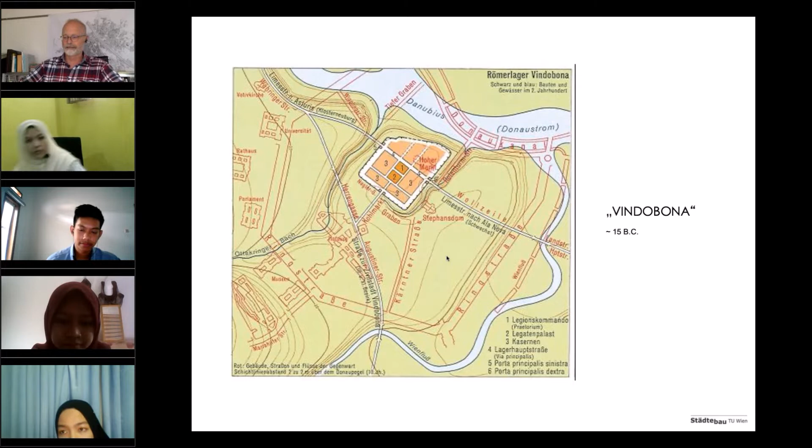These Roman camps always had the same layout, and they are still somehow visible in the urban structure, in the morphology of the city of Vienna.

And also what we can see even in this urban structure is the force of the water of the Danube River that damaged even the Roman fortification 2000 years ago. So it's really an important element of the urban structure in Vienna, the river, the Danube River.

In the medieval time, Vienna was not that important. It was a city among others. It was the capital of a small empire among many, many others in Europe.

Europe at that time was divided into a lot of small kingdoms, and Vienna was the capital of one of them, although they already started to build a huge cathedral, a Catholic cathedral at that time. The city itself was fortified. It was strongly related to the Danube River, but it was a dense but only small European city.

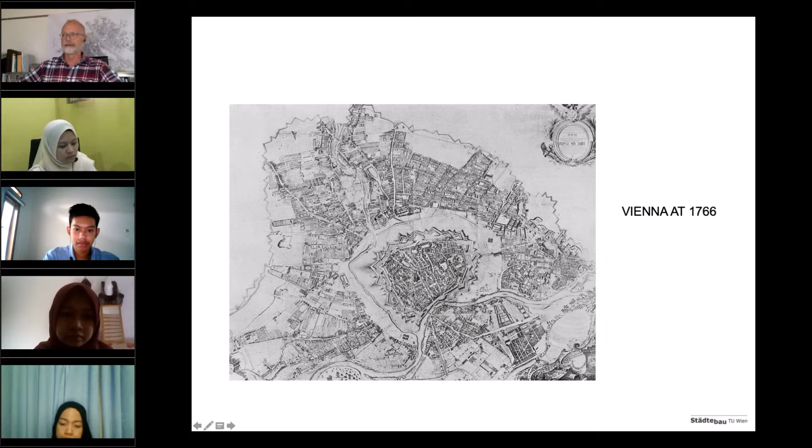Nowadays, this central part of the city, just to give you an overview a little bit about the city and an impression of how it looks like, the city center, which was the medieval city core at that time, is a very attractive place for international tourism.

The entrance gate to the emperor's palace - the Habsburg Empire, as you might know, ruled big parts of Europe in the last 600 years. And small markets and nearly medieval environments also appear in the structure of the city.

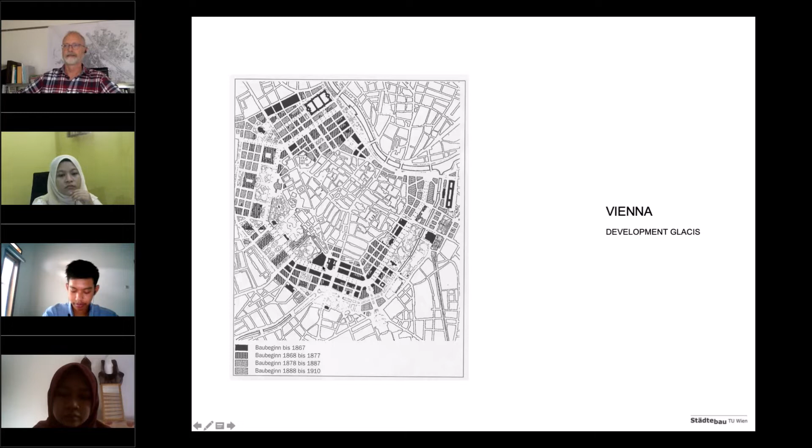A big change happened in the 19th century when the fortification was broken down and a huge area around the city center was totally restructured by a very representative boulevard, the Ringstraße, which hosts also the university, the parliament, the opera, the main theater, and the city council of Vienna. So many public and representative buildings have been located along this new boulevard in the 19th century.

It has vineyards, it has forests, and also a quite massive amount of agriculturally used land to feed the city. So in vegetables and salad and these kinds of things, Vienna is self-sufficient.

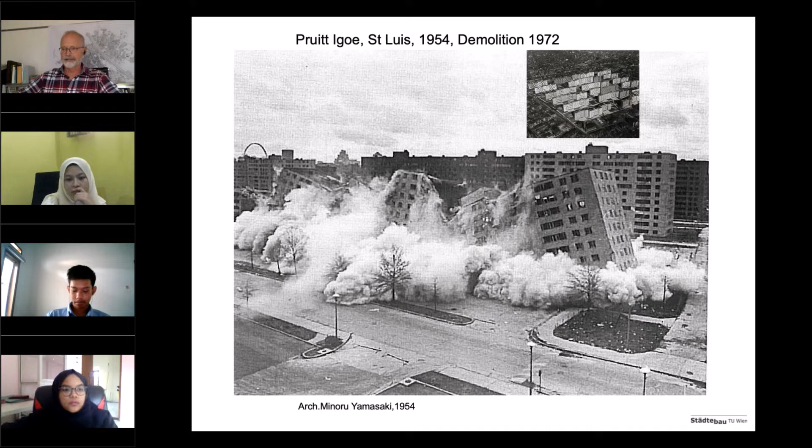This city is an old city and had very difficult periods, which I will talk about later. But why jump to St. Louis and to Pruitt-Igoe, the first radical demolition of modernist buildings in the 20th century? Because this time, the 70s and 80s, was the beginning of an immense change in the policy of how to deal with the old constructions and old structures within the city of Vienna.

The idea was that this district should be destroyed and replaced by a modernist social housing project that provides green space, parking, and sunny balconies and bathrooms, and all the facilities and infrastructure that a modern city at that time should provide to its inhabitants.

But a group of young architects and young students, also from our university, engaged themselves against the demolition of this Baroque district and started to demonstrate and to activate the politics, to protect the buildings and to renovate them.

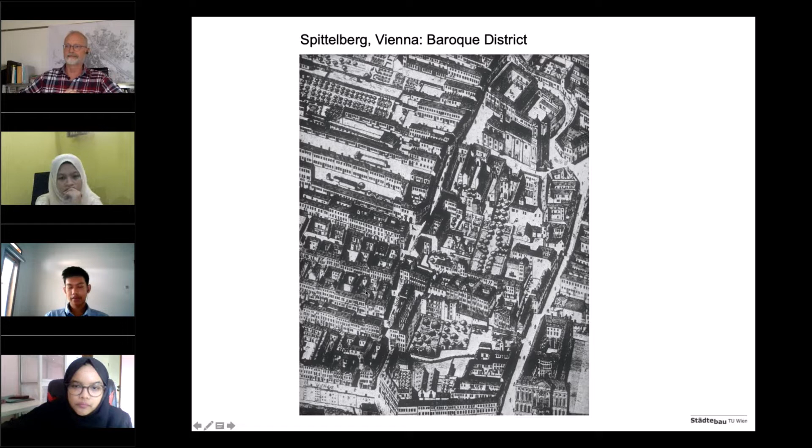This is the Baroque district I'm talking about, a very dense, very tiny and very interesting structure, but also in a very bad condition. So this was the beginning of the urban renewal program of Vienna.

This is very strongly related to social housing, because the principal idea of this program is that by renovating the districts and old buildings, the inhabitants should not be moved out. They should be able, even after renovation, to pay the rent, and they should be able to live in the environment they grew up in or lived in before.

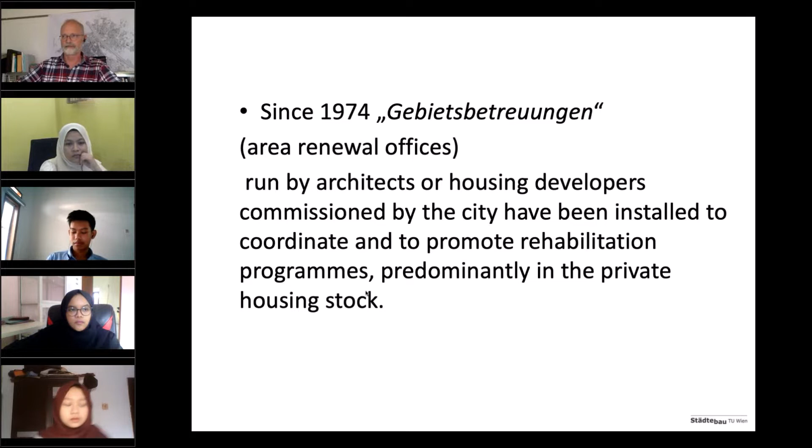Also at this time, they started neighborhood councils that somehow provided information for the process of renewal of the historic city, and also helped both the house owners and the users, or the people inhabiting the buildings, on how to deal with this process of renovation and with the existing offered funding for the renovation of their units and buildings.

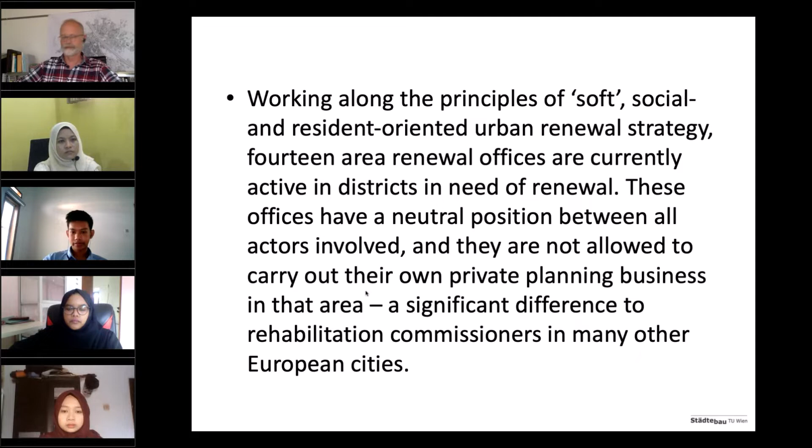This social or resident-oriented renewal strategy was divided among a couple of different offices. They were run by architects, in cooperation with social workers and construction engineers, and they provided a lot of information and interactivity between the different parties involved in such a renewal process. And for this strategy, Europe's cities learned a lot from Vienna.

This rehabilitation program, now at the end of this process, as you can see in the next slides, refurbished approximately 250,000 apartments. That means over 7,000 to 10,000 a year.

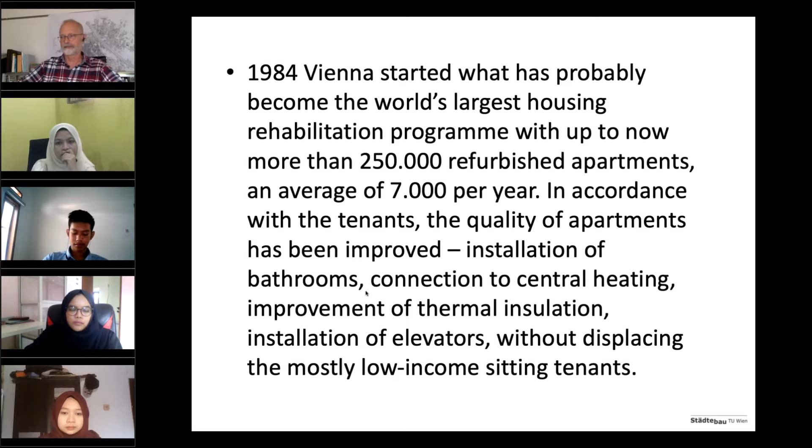During the last decades, this really changed a lot the situation of the housing market in Vienna. Not only for the good, because this improvement in the quality of the apartments also increased the market prices, and somehow caused a segregation for those who couldn't afford this new market situation in the city of Vienna.

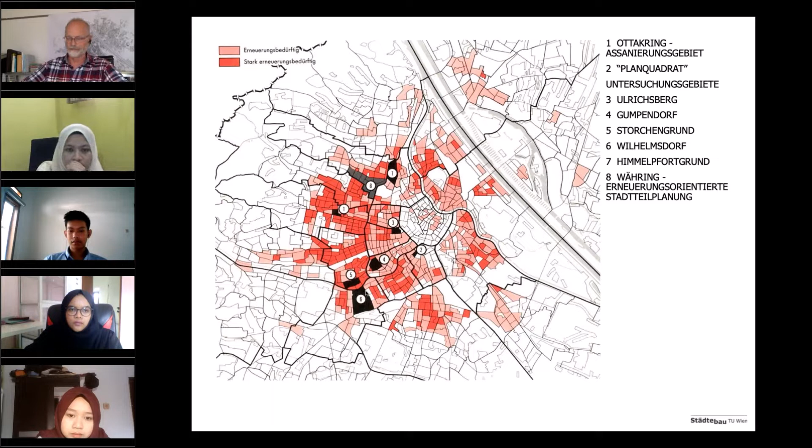To give you an impression about the housing situation of the beginning or middle of the 19th century, I would like to show you not only the urban fabric of this Gründerzeit development of Vienna from the 1850s, 1880s, but also some floor plans and pictures of the life circumstances of the people in everyday life.

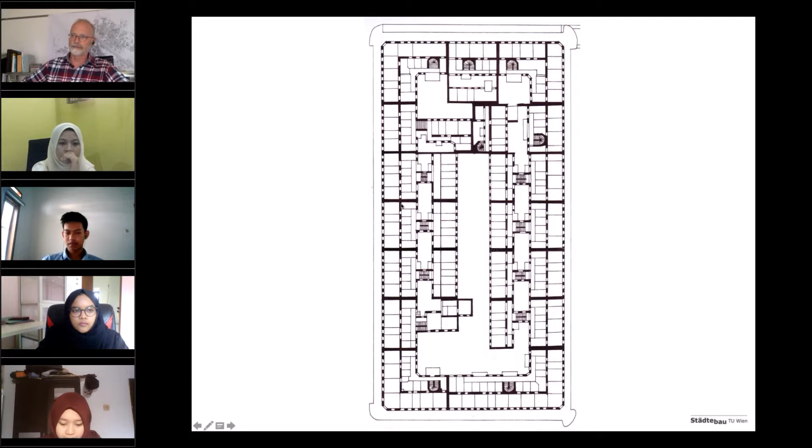Each unit here is one house, owned by a person or an institution, divided into a couple of very small apartments. Some of them only exist of a kitchen and a small room. They shared toilets usually outside on the corridor, and they shared one staircase. You see very small courtyards, nearly no light in the inner rooms, no ventilation for the kitchens — really difficult situations and circumstances for the people living at that time.

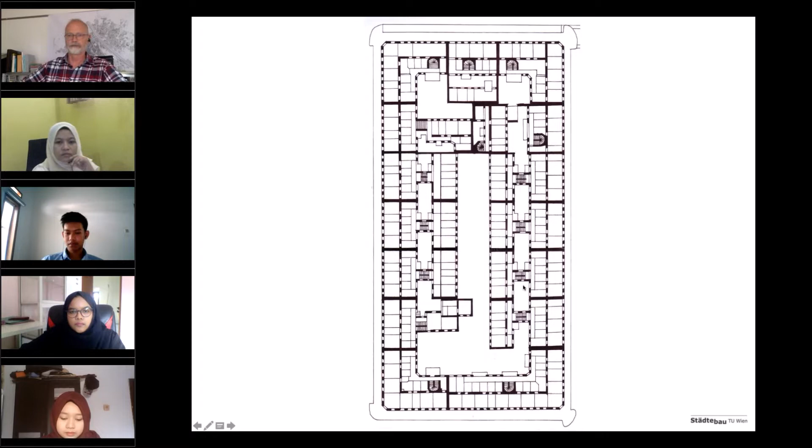You can imagine 10, 15 people living in one of these 30 square meter apartments, sharing their bed, hardly able to heat their apartments with coal or wood. Not a very pleasant situation.

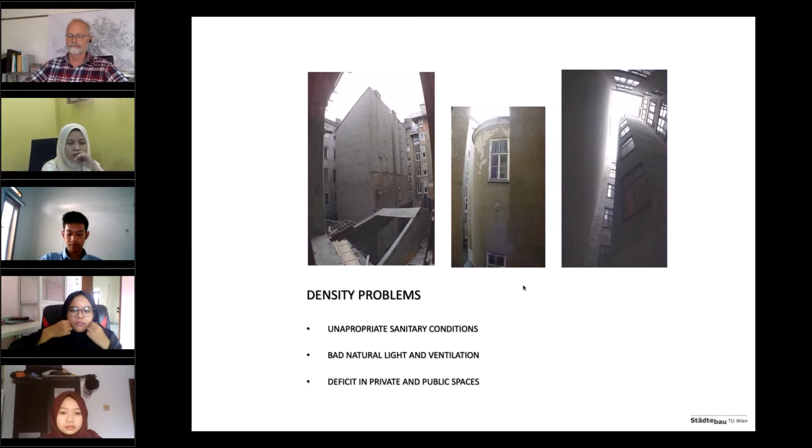This density of the development at that time also caused, of course, not only inappropriate sanitary conditions, but bad natural light and ventilation, and a lack of public and private spaces as well.

As a result of this situation, after the First World War, where the situation really came out of control, a lot of informal settlements appeared around the city in the forests or in the countryside. This was caused by the First World War, when many Austrians who had been living in the huge empire before came back to the capital.

As you can see here, there's a strong improvement in the quality of the floor plans. You have a bigger kitchen, a balcony, and toilets, which is an important factor that didn't exist in the old situations of the 19th century. But you didn't have a bathroom, and the apartments still have been small.

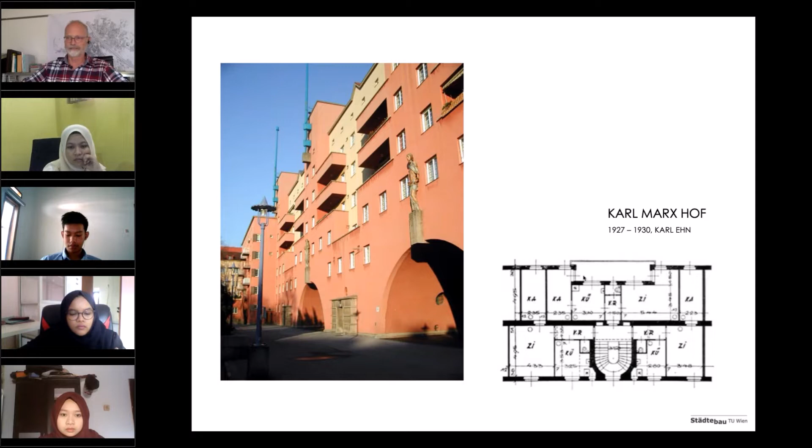There are incredible amounts of informal developments, like in a city of the global south nowadays. A very similar situation, and the housing conditions have been very similar, caused by the extremely desperate situation of the inhabitants at that time, and the refugees coming to Vienna.

In this circumstance, the Socialist Party also followed a strategy called the settlers movement - an organization of those that inhabited land informally, to help them improve the conditions of their houses and their living circumstances, although they did it in a more or less informal way. In this atmosphere, architects also engaged very much in the social housing program.

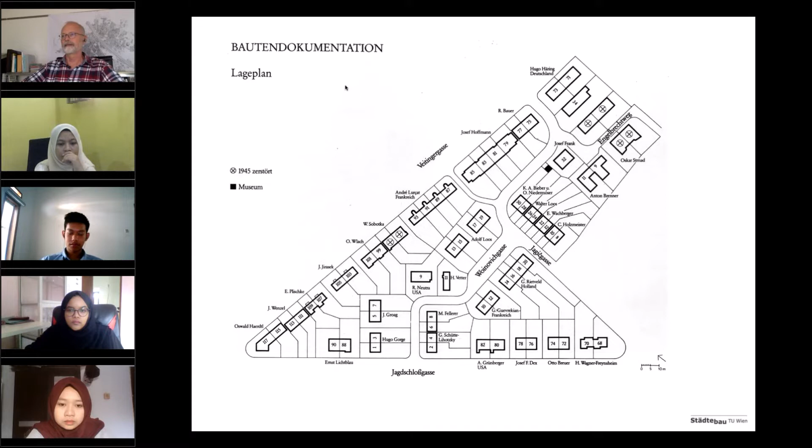Nowadays, even more beautiful buildings, because the green around is more dense and developed, and the whole settlement is very well renovated. You see names of very many internationally well-known architects from that time, like Rietveld, Loos, and many others working on this project.

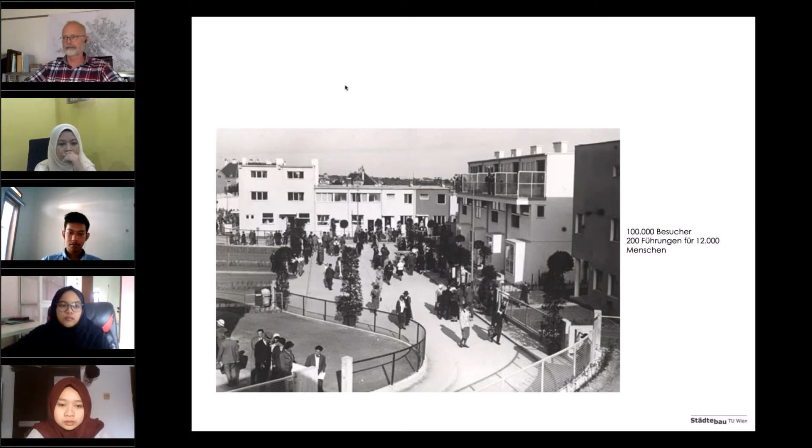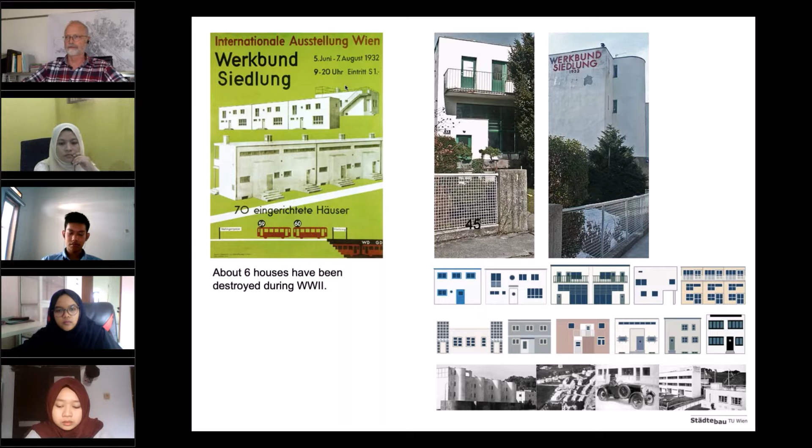The opening came together with the world economic crisis in the early 30s, and the buildings couldn't be sold, as the original plan was that from this exhibition the buildings should be sold to new users. In this crisis situation, the city of Vienna had to take over the buildings and include them in the social housing program of Vienna.

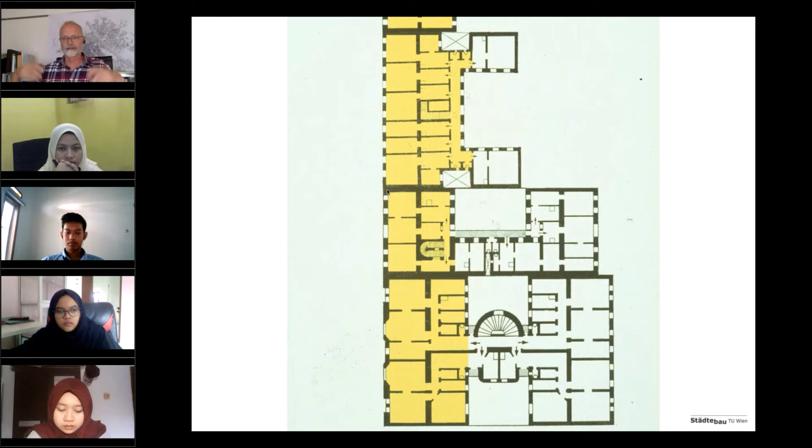Coming back to the Gründerzeit and the renewal program, I would like to point out that in the 19th century, the housing quality within the urban structure of Vienna, in these densely organized blocks, was very different - from very small and tiny apartments to huge luxury apartments with bathroom, toilet, sometimes even two toilets, two bathrooms, and so on. From the external appearance they look the same, with the same decorative facades, a lot of stucco, decorations, columns and figuration, but inside they offered a wide range of different possibilities.

The section of these buildings is also quite important, because it was always a mixed-use building, somehow hosting facilities for small companies, even light industry, shops, and always a contact or dialogue between the street, the public space, and the ground floor of these blocks, providing the necessary space for economic activities, while in the upper floors different housing units were placed, and the people, sometimes even the owners, lived in the house.

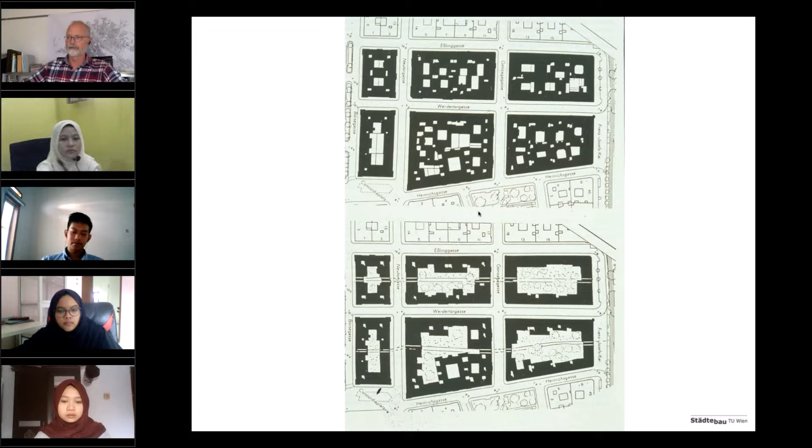These dense courtyards, as you can see in the upper part of this picture, caused a lot of restrictions in light and ventilation for the housing situation in this historic context. One of the strategies of the urban renewal was to open up the courtyards, to provide green space inside them, and also to open up a new pedestrian crossing possibility within this structure.

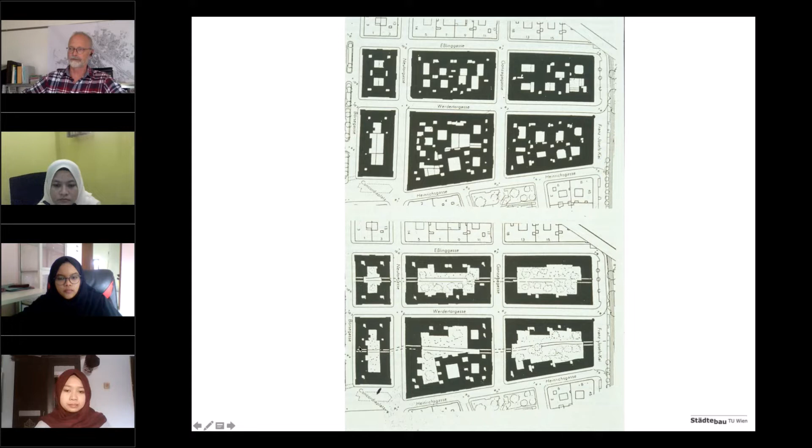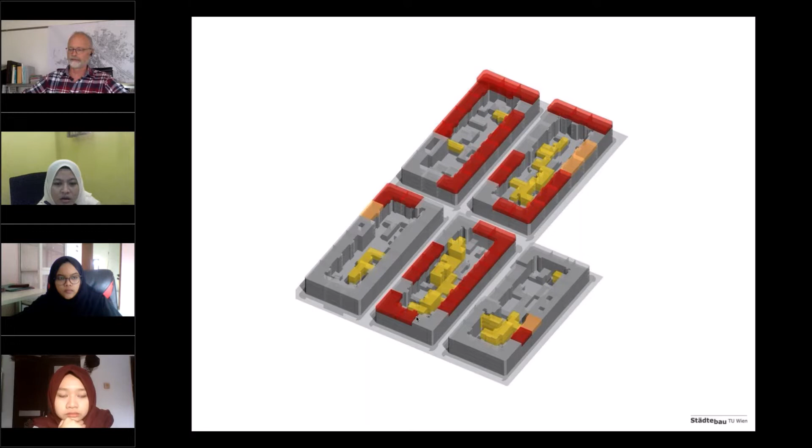This was a kind of exchange program - an exchange of volumes inside the blocks in exchange for an increase in the height of the surrounding structures, by offering housing opportunities in the top floors of the old buildings.

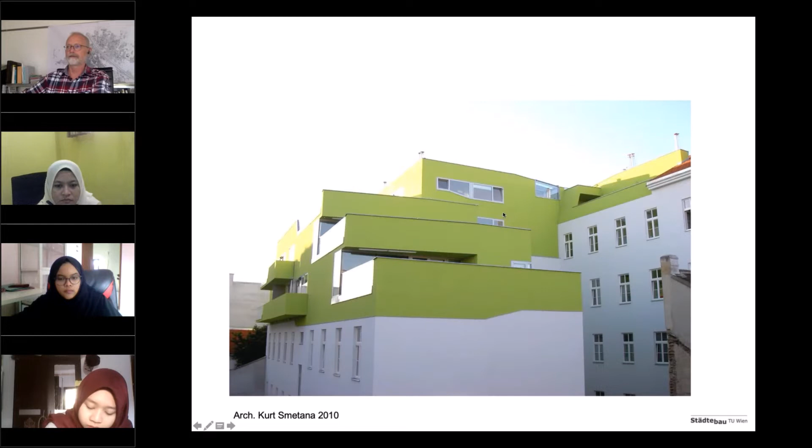This is a very typical example for this period of renovation. You have terraces, an increased height of the building - we're talking about the same building here - and a much better quality of the apartment. The same here: new courtyards, new use of the backyards, new buildings in the backyards. So this was really an impressive step forward in the quality of the historic situation.

But not only the historic part of the city had to be changed and adapted to the needs of the 21st century - also the city itself, the development of the city itself, had to be planned and readjusted.

I will talk only a few words about the tools for it. This is mostly the strategic development plan of Vienna, which includes a lot of specific topics and describes, as a whole, the strategies for the next 10 years of urban development.

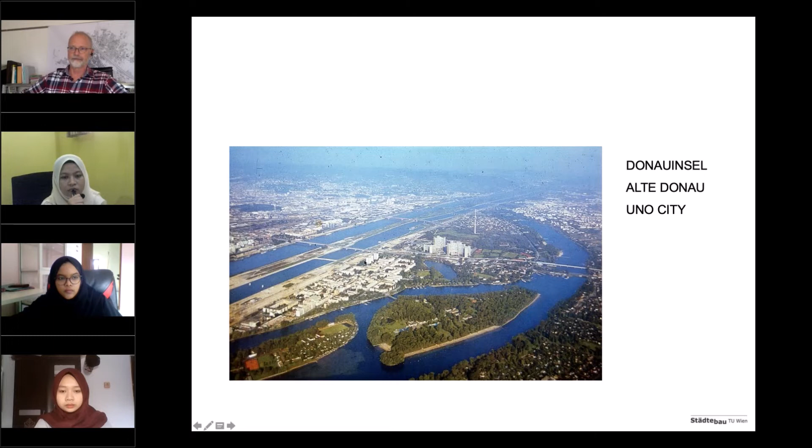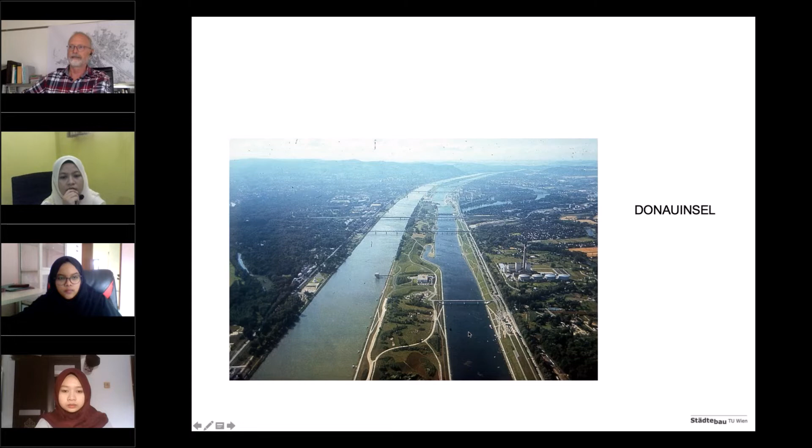I'll show a couple of examples that dramatically changed the situation in Vienna, like the floodwater protection program of the Danube Island, which now offers a huge lake-like situation and recreational area in the city center of Vienna, as you can see in these pictures.

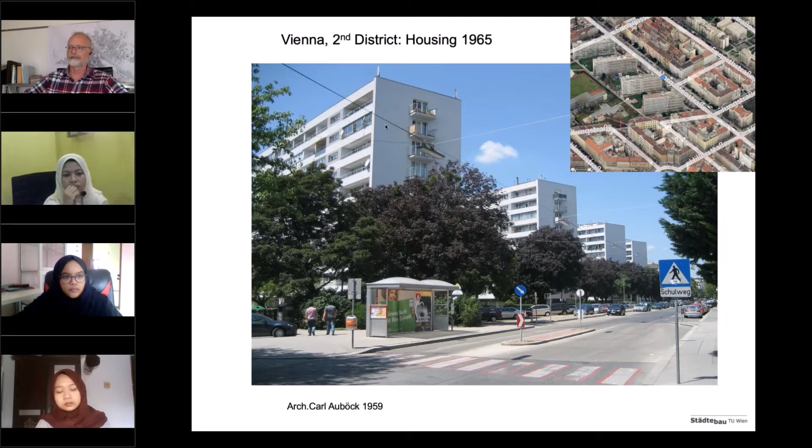This was one of the public spaces that dramatically changed Vienna. And of course, social housing that started in the 50s with south-oriented slabs of modernist buildings continued over the decades into different scales and proposals. This first typology from the 50s or early 60s offers smaller and bigger apartments, usually a ventilated and naturally lit staircase, an elevator. Every apartment has a bathroom, a kitchen, a toilet.

So the standards increased compared to the period between the two world wars, when the bathroom was not part of the social housing floor plan.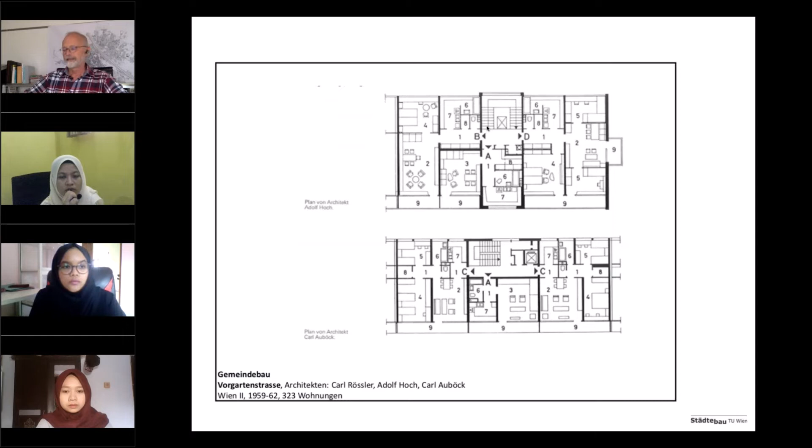Then the dimension of the projects became bigger and bigger. In the 70s and 80s, the city of Vienna built up to 3,000 to 3,500 apartments in one project, but also added facilities like kindergartens, swimming pools, rooftop terraces, in quite massive constructions. But up to nowadays they still provide huge satisfaction for those living in these complexes.

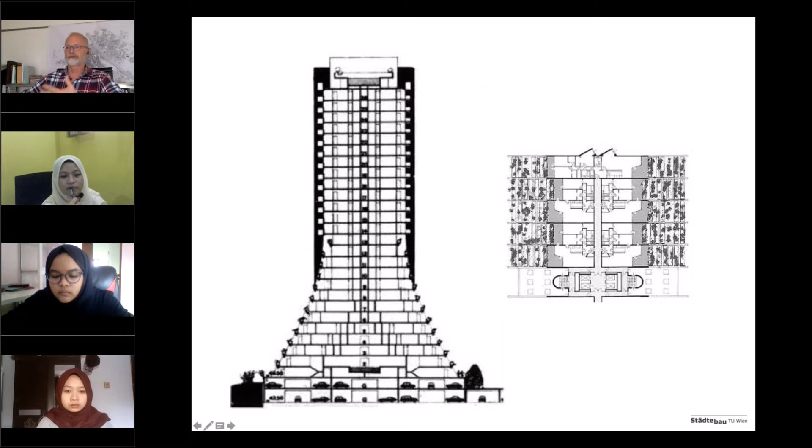There are community spaces like gymnastic rooms or workshop spaces in the central part, also parking. All the apartments had a terrace, a small garden or planting area on the balcony, and a variety of typologies within these structures, from 4-room to 1-room apartments, for bigger families or singles - quite a mix of users within the building. As I mentioned, about 3,200 apartments, 9,000 inhabitants, all built by one architect.

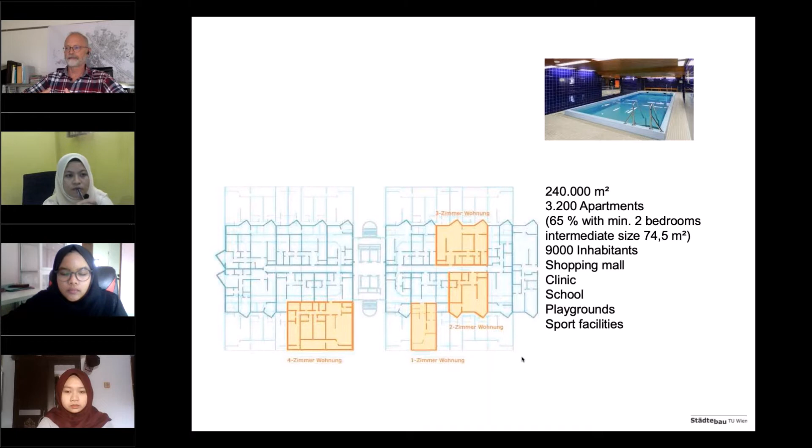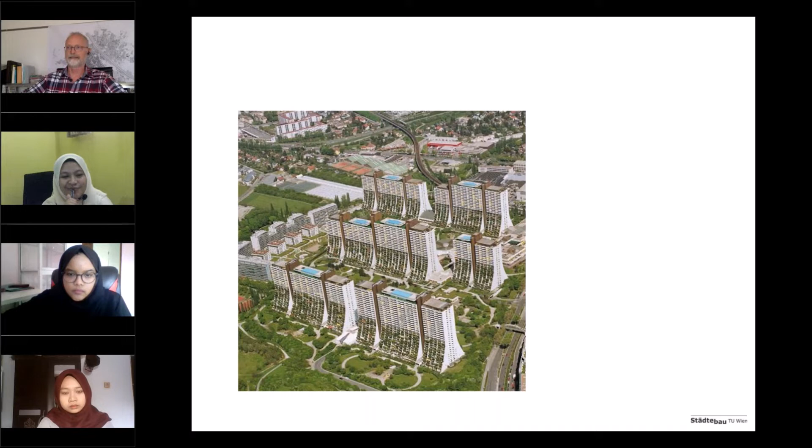Although a very successful project still providing good quality of life, it caused a lot of criticism from other architects, since one office was doing such a huge project while others were not able to contribute their ideas or proposals. This led to a change in the policy of Vienna, coming also from the renewal strategy in the historic context of the city.

Now the dimensions of the projects changed, and also the involvement of players changed in the development of social housing. The institutions I mentioned before, that help manage conflicts between owners, renters, and store owners in the district, extended their activity into new developments. At the same time, there was a procedure embedded in the process of social housing called housing developer competitions.

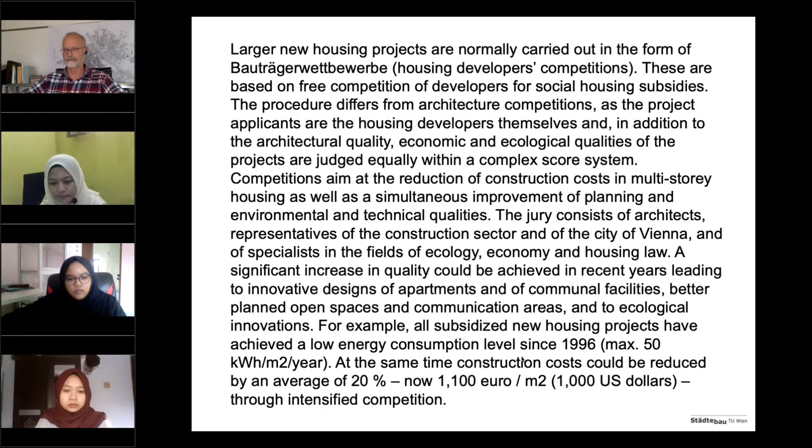I'm sure you can read this text while I'm talking, so I won't go into detail, but to explain the circumstances: these competitions no longer included, like before in that huge project with swimming pools on top, only an architectural competition. They also included a construction developer who guaranteed the costs and quality of the building, and an architect who guaranteed the quality of the floor plans and the architecture. These two players had to work together and apply together in a competition. This was a huge step forward to improve the quality of social housing in Vienna, and also to reduce the scale of the housing projects developed in these years.

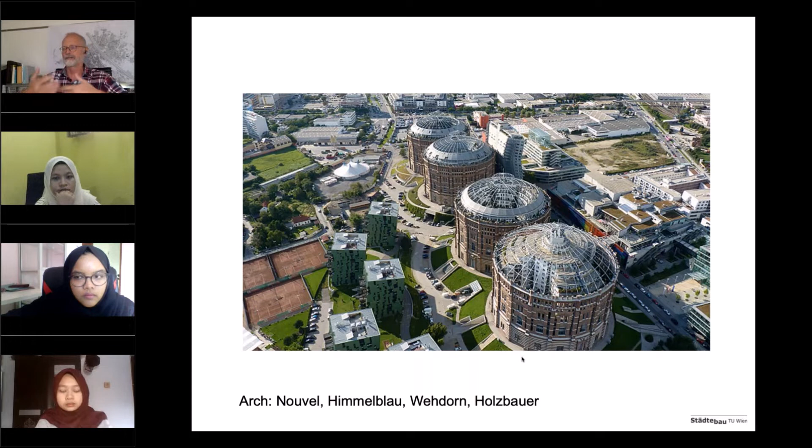This project I'll show because it's very impressive - a mixture of a renewal project and a social housing development at the same time. This was the gas tank decoration we saw before. In the 90s, Jean Nouvel, Coop Himmelblau, and architects Wehdorn and Holzbauer - two very famous Austrian players - converted these decorative brick walls of former gas tanks into social housing units. They also started the development of a whole new district of Vienna through this core project, an initiative that began the transformation of an industrial area into a housing development and district.

These are some pictures of this proposal. You see the outer brick walls are still existing. Some oriented their project to the inside, to the courtyard of the projects, as shown well here. One did it the other way, oriented the apartments to the outside. So you have different approaches.

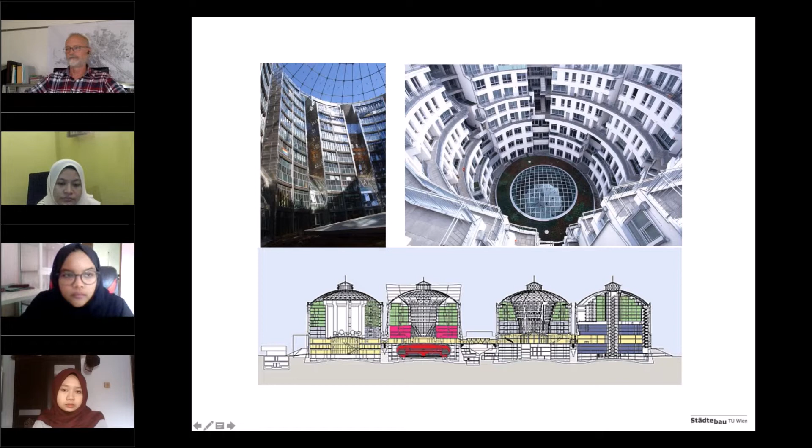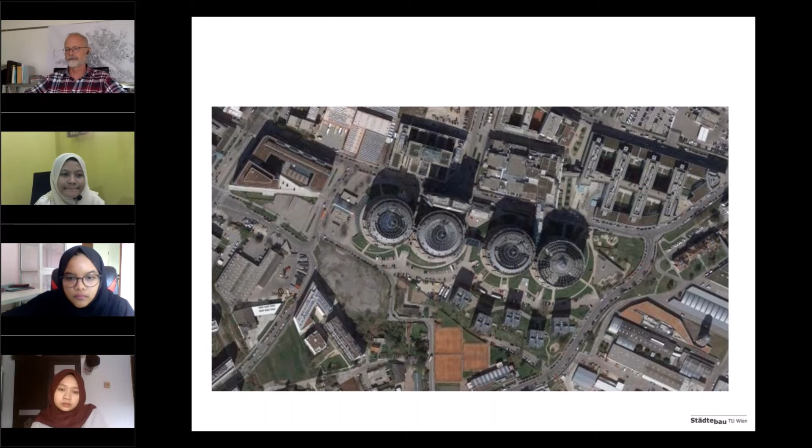There is a shopping mall in this project, integrated with a concert hall for about 3,000 people. A lot of interesting contributions, and not all of them worked. Some had to be changed. The shopping mall became a music city. And nowadays, with the densification of the surrounding, I think the whole situation there has stabilized a little.

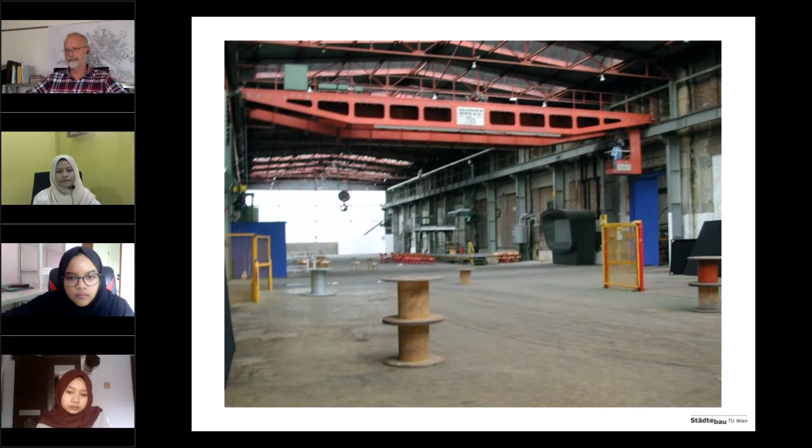In this process of transforming former industrial areas into social housing developments, one remarkable project is a former cable factory. I just want to give you a visual impression of this colorful development that also included the future inhabitants in the design process. It was the first participatory design process in Vienna, where a social housing development included future residents to contribute with their ideas and proposals in the development.

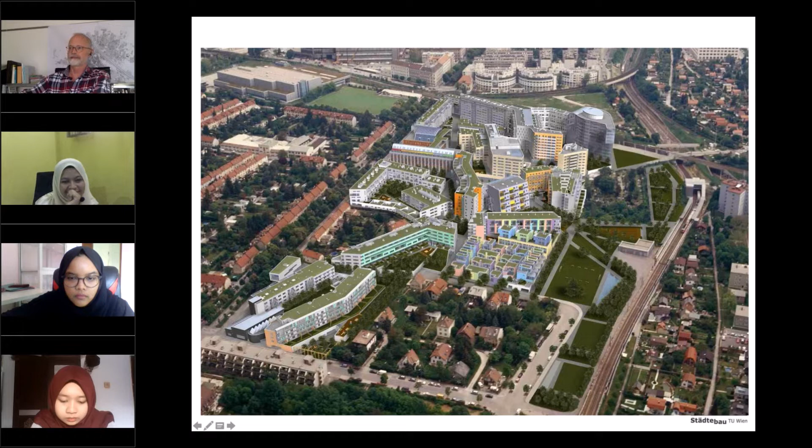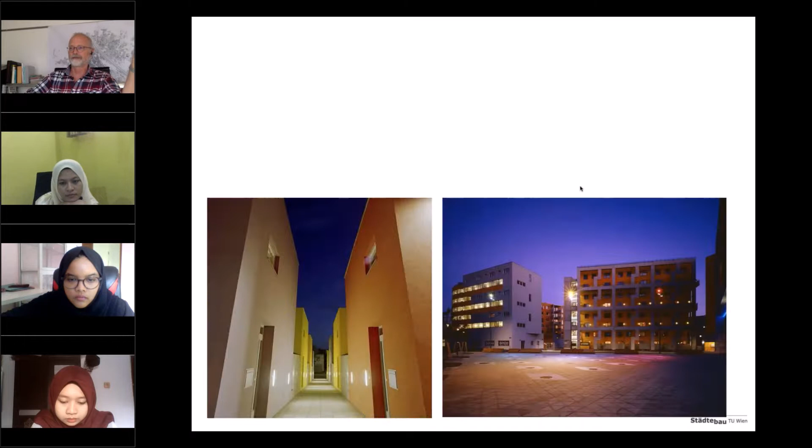Nevertheless, it became in some parts a quite dense structure, as you can see in this part of the project. But I think it's never depressive or frightening, because of its colorful appearance and the open spaces that are provided. It's a quite successful project and proposal in social housing of the 21st century.

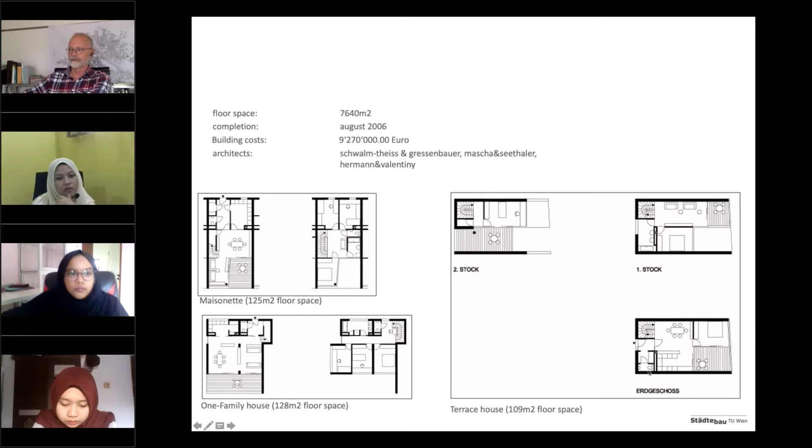Here we see the floor plans that are offered within this unit. They also offer terraces, balconies, and some of them over two levels, like a two-story building within a social housing project. Small units and really interesting configurations over even three floors in row houses and so on. So a huge variety of possibilities.

Some of you might have known or heard about a European competition for young architects. It's called Europan, where many European cities participate by offering sites to young architects and young studios to contribute with their proposals. One of them was Vienna, and they offered this site in the outskirts of Vienna. You see also already single family houses around. This is, let's say, the last part of the consolidated city.

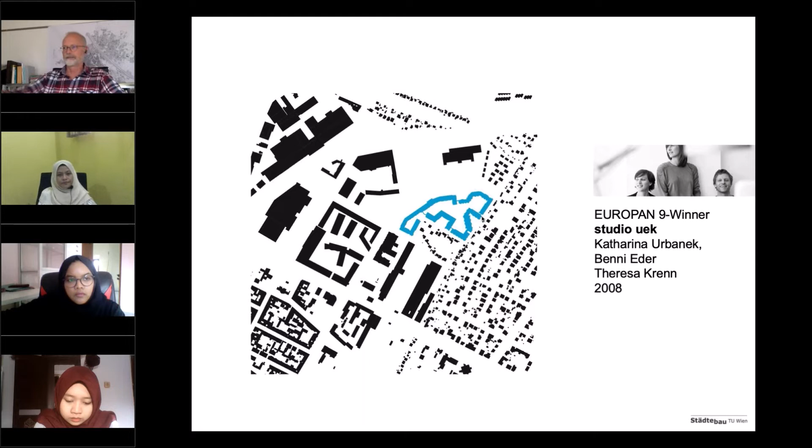In this part, where density becomes lower and urban structure becomes more suburban, this studio UEK proposed this project. The specific quality of this project was that it was one of the first to offer the roof as a second public or semi-public space for the inhabitants or residents of this building.

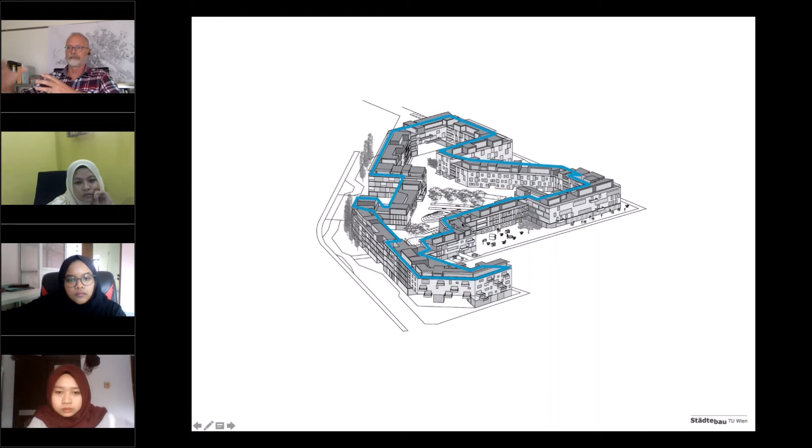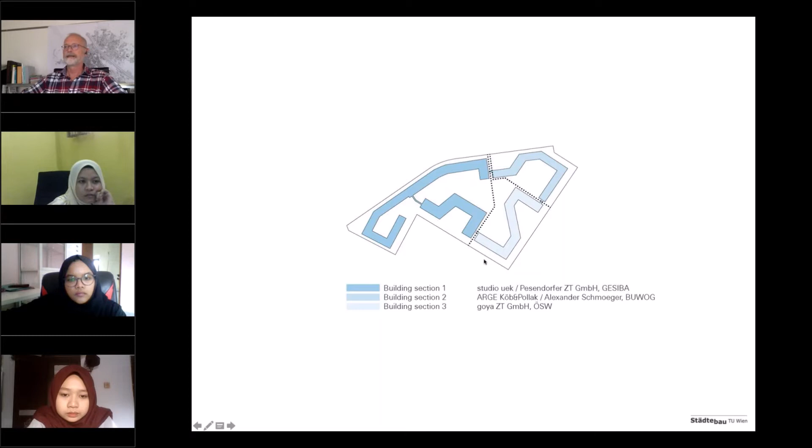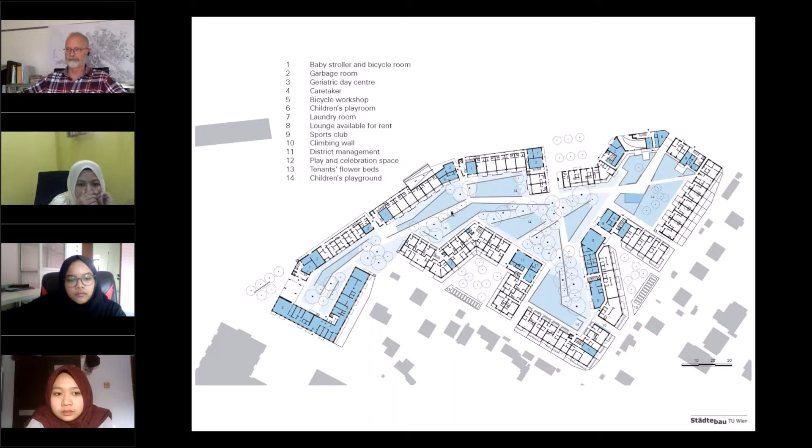Although some parts of this urban master plan have been given to different architects to finally design the project, as you can see here - this was one studio, and this another - they had to agree and cooperate on the design of the public space. Usually they do it on the ground floor in the courtyards, as you can see here, but in this case they also had to do it on the rooftop.

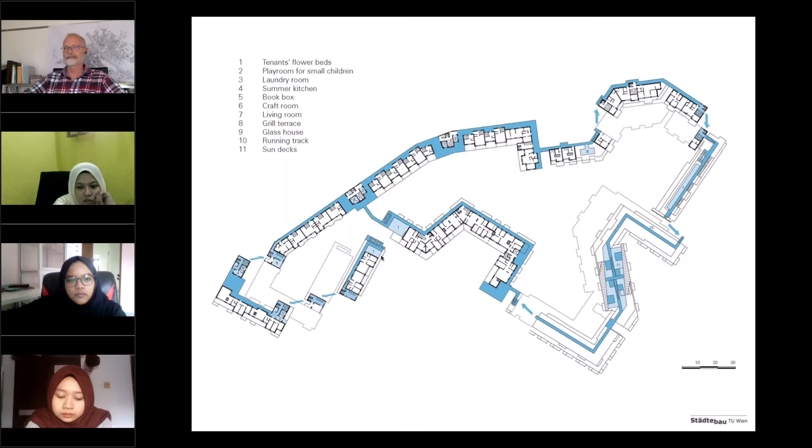These are some other examples of floor plans that we have in this project. But what is more interesting than the floor plans, because they are similar due to restrictions and regulations in all social housing projects in Vienna, is this second connectivity and network on the rooftop, and these open spaces offered on the roof of the buildings, like grill terraces, sun decks, and so on, always connected with the vertical elements, the staircases, elevators in all the buildings. Although they are managed by different companies and designed by different architects. I think this is a remarkable step forward in the development of social housing in Vienna.

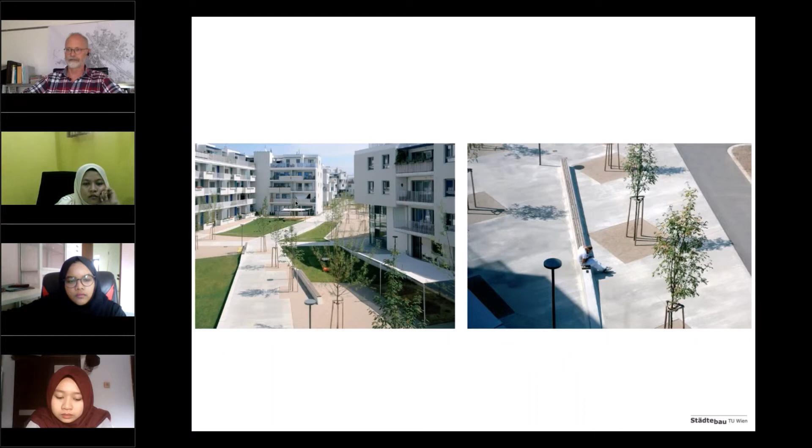Some impressions of this project - the bridges, and you see also some pictures from inside, because one of the studios is a friend of mine, so I have access to a lot of material.

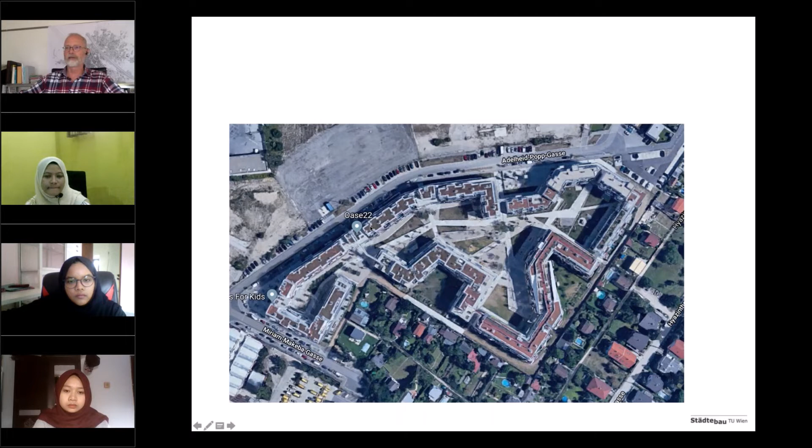Within the studios or apartments, you sometimes have double ceiling heights. You have communication spaces or benches in front of the apartment doors so that the neighbors can communicate with each other. This is the view from the top of this project, Oase 22, where you can walk along all these green spaces and open roof terraces from one house to the other.

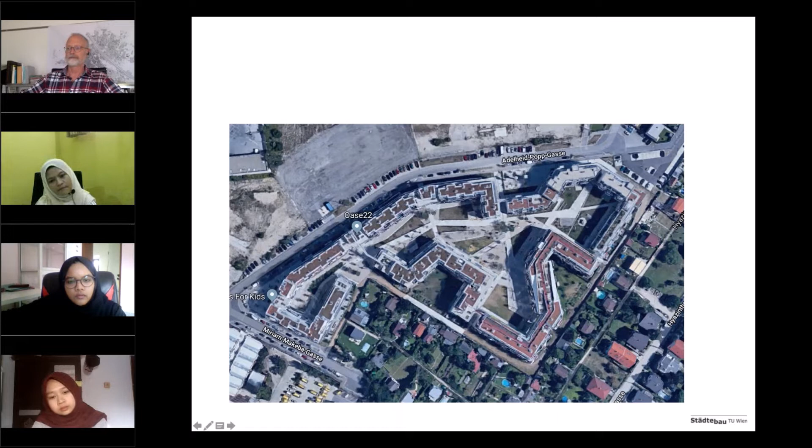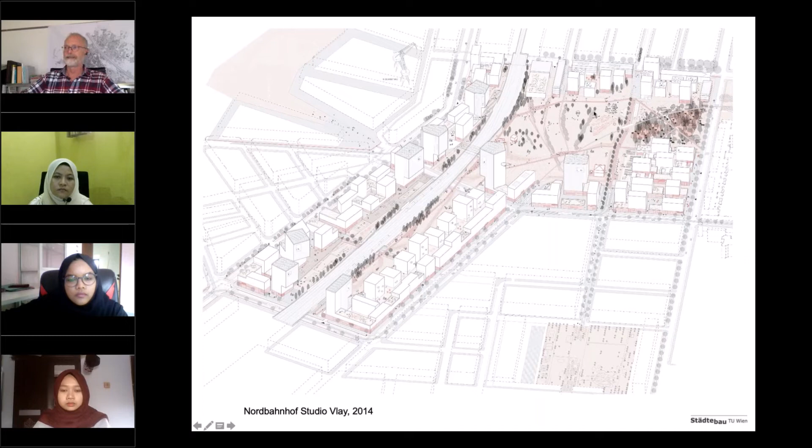An important second project in social housing is this one. This is important because of the way they dealt with the public space. They condensed the development of the housing projects along the boundaries of the development area and kept the central area free as a wilderness, to become a kind of central garden or central park for this housing development.

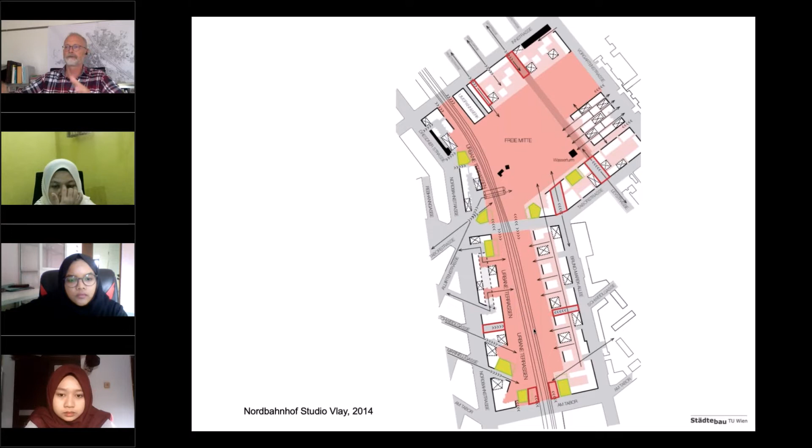This is still in the scale of an urban master plan, so I will jump through it very quickly, but just to show you a little bit the connectivity between the city around, the consolidated structure of the city, and this inner open space that is becoming a kind of public park for the whole neighborhood, not only for the development area itself.

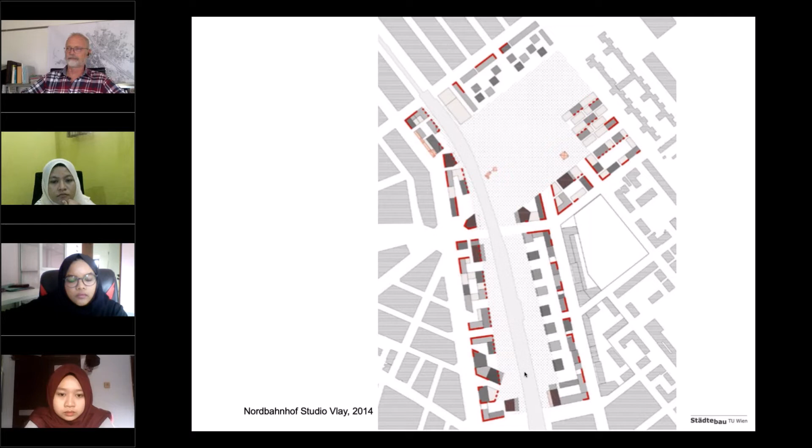This was an interesting contribution, and now it's under development. So we see the first buildings rising up here in the near future.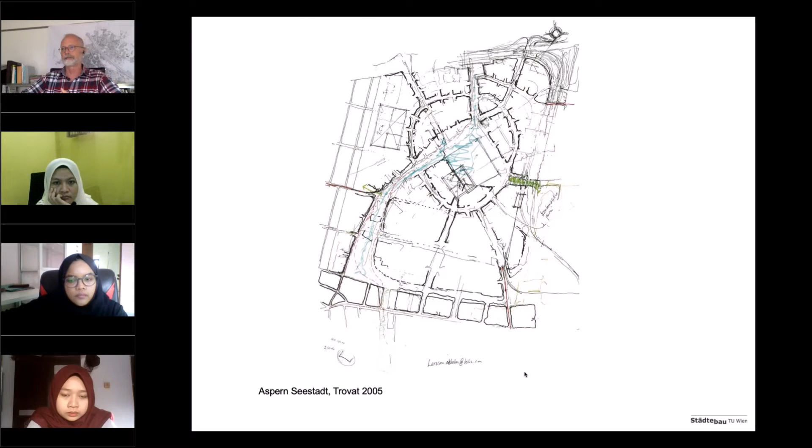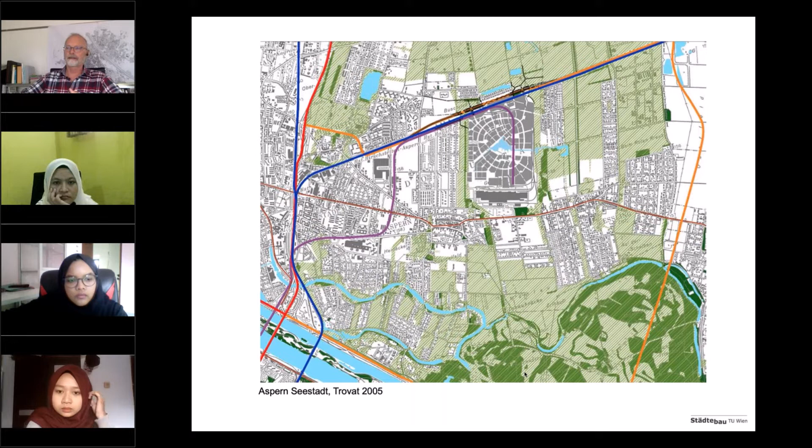The last huge development project I will talk about is the Seestadt Aspern. It's an urban development, but it's also a very large social housing development, offering accommodation for up to 20,000 inhabitants in new residential districts. It's a satellite city, with a concentrated, circular structure that forms the main access road.

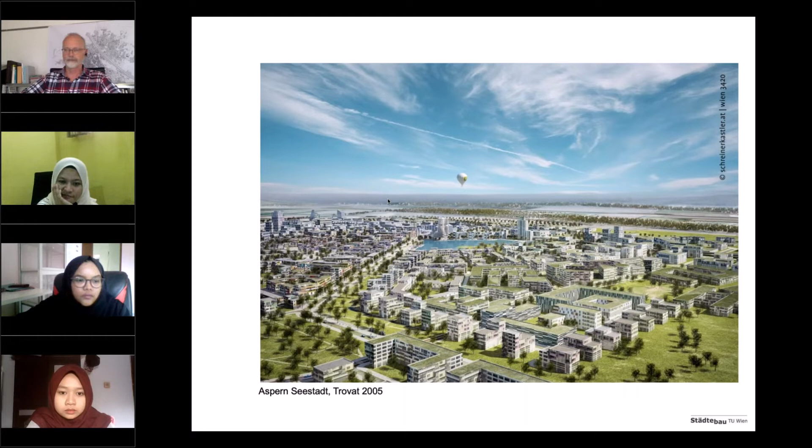There is a lake or a recreational area in the kernel of the development, with different layers of public spaces of different qualities, offering affordable but middle class social housing in the outskirts of Vienna.

This development has one remarkable specific condition: they built the subway to this development before they started building the first house. So when the first projects were built, there was already public transport infrastructure of the best available quality on this site. This is a big advantage for people moving into outskirts or satellite cities, since connectivity to the city and traffic is always an urgent topic in these developments.

You see it's still under construction. We are now in phase 4. I think this was phase 1, this was phase 2, this was phase 3, and now we are going into phase 4. It will last a couple more years till it's finished.

We will see how it develops in the future to the south, because there is an old factory of General Motors, a car manufacturer, which will disappear sooner or later. So maybe the subway will be lengthened to the south, and the structure will change in this part of the city very fast and very dramatically.

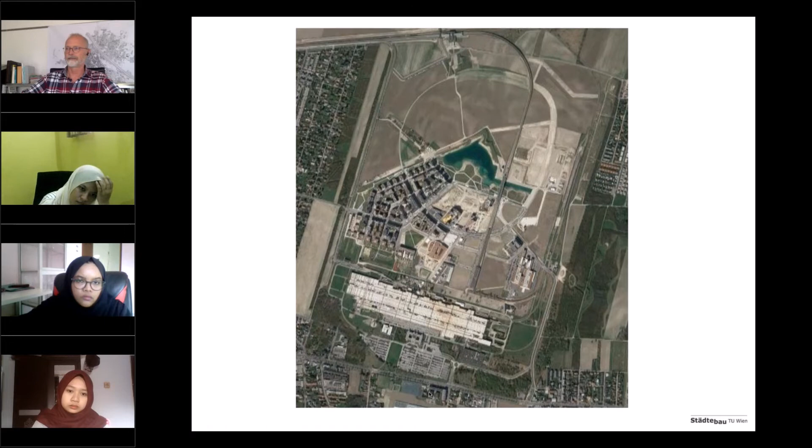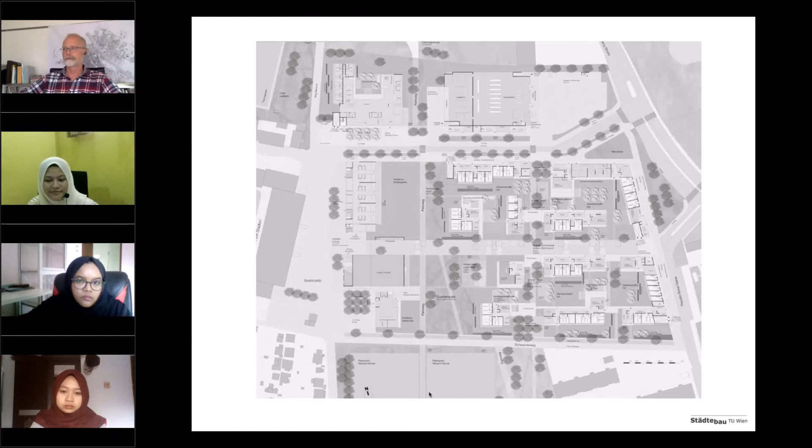At the very end of my presentation, I'd like to go back a step to the scale of social housing. This was an urban design competition I participated in together with Königlarch, as a proposal for development along a train track.

This is a cargo train track in the outskirts of Vienna. Our proposal was to somehow build a kind of protection or protective object along this rail track, creating a more silent and enclosed inner space, a courtyard-like situation for a kindergarten, playgrounds, and some other housing units.

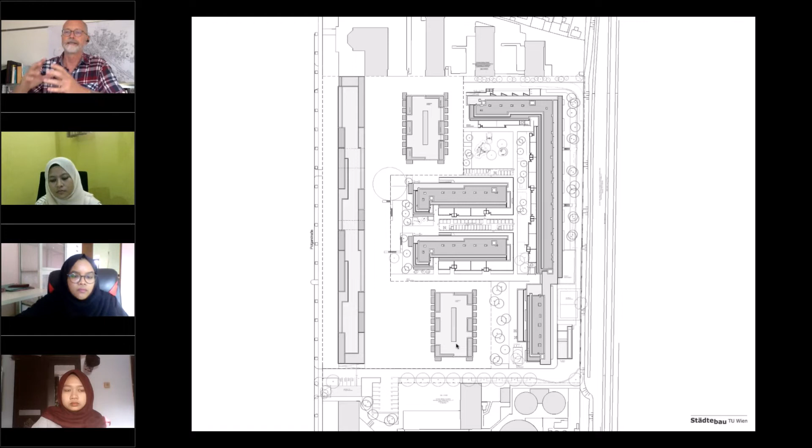As in all these urban master plans, a part of the planning area is developed by the winning office. So that was this part here, and some other objects within this master plan are further developed by other architectural offices, as a result of the developer competition processes I mentioned before.

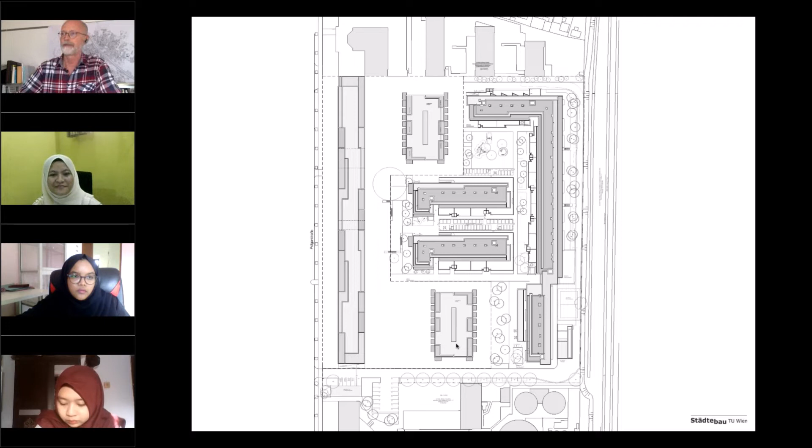So the urban master plan is the first step, and then within the frame of the master plan or urban design, you have to compete as an architect together with a developer, proposing for some segments of this master plan. This was the wall that faces the train tracks and somehow protects the inner circulation and the apartments from the noise of the tracks, while also offering some emergency staircases.

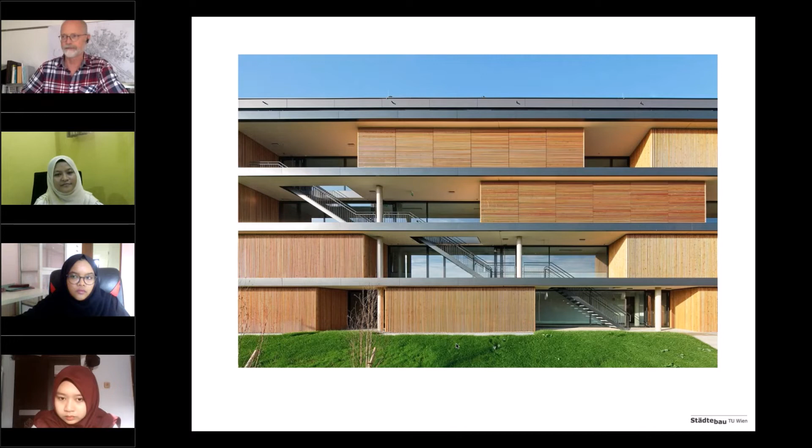Storage rooms are behind these wooden boxes. The other side is more open, oriented to playgrounds and basketball fields, has sliding sun protections in front of the balconies, and some small gardens on the ground floor.

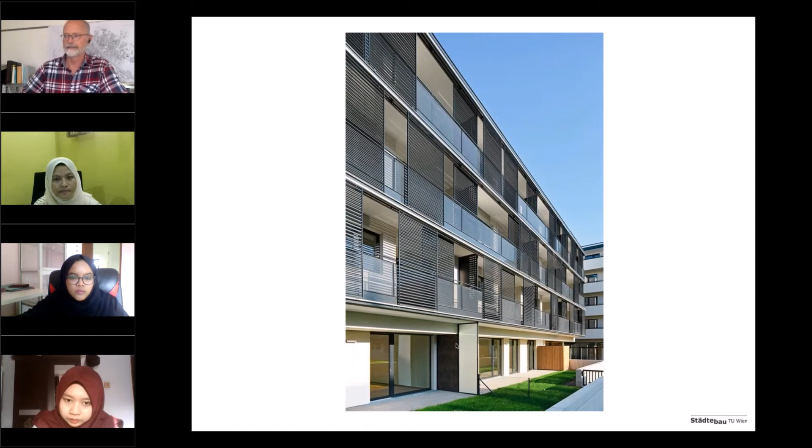So this is the standard of social housing at a better quality in Vienna nowadays. These projects also offer a lot of different apartments accessible by this inner circulation area. You have a widening of the corridors for bicycles and strollers, and all this equipment you nowadays have to bring close to your apartment for charging bicycle batteries or whatever.

So this is changing. There are also storage rooms for bicycles to change, helping to shift the modal split and avoid the use of cars in the city.

Also here you see the trains outside, the cargo trains. The staircases are always with natural light. They are colorful, trying to be as friendly as possible for the residents and users.

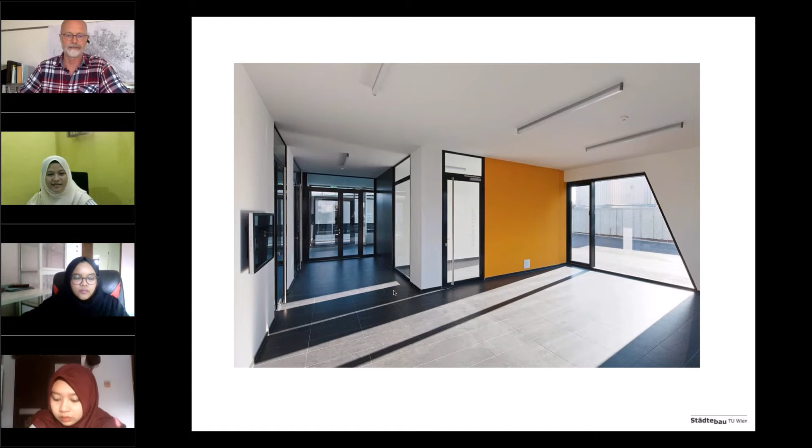There are always some spaces where people can come together, where they can meet, have a party together, or just sit and talk. There are some rooms available for the community of residents to be occupied with their special interests. That's a result of the discussion of the community itself.

Also, the apartments are always with open kitchen or closed kitchen, depending on the wishes of the residents, but they usually have light from two sides, and this is a quality that is becoming more and more important now in the layout of the floor plans of social housing.

So when we have a look here, you have all these semi-public or more private installations. There is also a kitchen for a party facility, the staircase. This is the kindergarten for 3 groups with playgrounds in front, and always private terraces or loggias for all apartments facing west or south.

You see the bicycle storage rooms and many other facilities, garbage and so on, many other facilities that are necessary for social housing competitions to succeed nowadays. This is one of the upper floors.

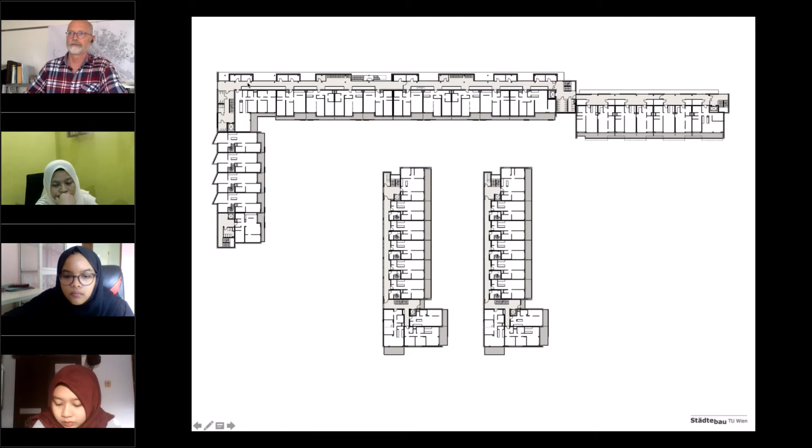The typology of the apartments is, of course, similar, but has varieties in the sizes and the amount of rooms. Here you see these storage rooms, the wooden boxes that are facing the train tracks as well.

In some sections you see not a lot of garage underground - only a small part of the building has parking underground, so by far not enough for all the residents. But this is a political decision not to provide too much parking, to make people use more bicycles and public transport, to change the modal split.

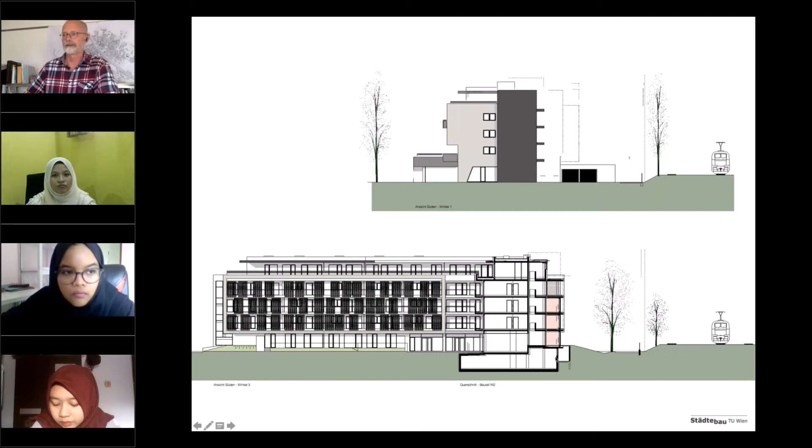Here is the area of these boxes, the train tracks that are somehow the enemy of this development. When we look into a detail of one of these apartments, for example, you see this internal corridor with the storage boxes.

There is always a gap between the corridor and the windows of the kitchen, so that people cannot directly walk along and look into the kitchen. There is a widening for the entrance, so you can put the kinderwagen or the bicycle in front of your apartment door. Then you have a storage room inside, a small one.

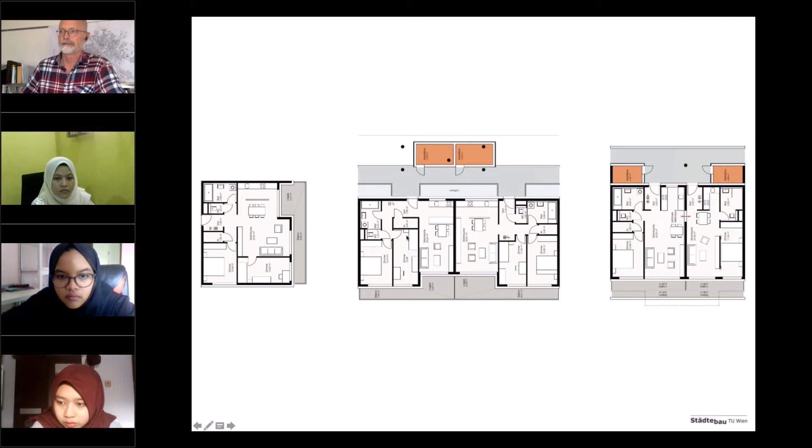You have a bathroom, usually with a bathtub, at least when you have more than one sleeping room, the master bedroom, a separated toilet, a children's bedroom, and a living room, with terrace, balcony, and loggia on the west side. So this is somehow the typology of social housing nowadays in Vienna.

And with these last details, I would like to say thank you and welcome to Vienna. It means a bit of a virtual welcome, but I hope we will have a successful semester and a lot of interesting discussions about social housing in Vienna. Thank you very much.

Hello, Professor. May I ask a question? Of course. Yes, thank you. My name is Arum. It's nice to meet you, even virtually.

So I have a question about the concept of reducing the building height to provide better quality, like you said before. My question is, if the building height is reduced, the number of units must be reduced too. Where do the people living there move to? Is there any addition in another area for them? I think this is my question.

Thank you, this is a good question, because it's a main discussion. When you do a renovation of a historic building, on first hand, not all the apartments are always occupied because of the bad conditions. So sometimes you have empty apartments and you can somehow manage to move some residents from one to another.